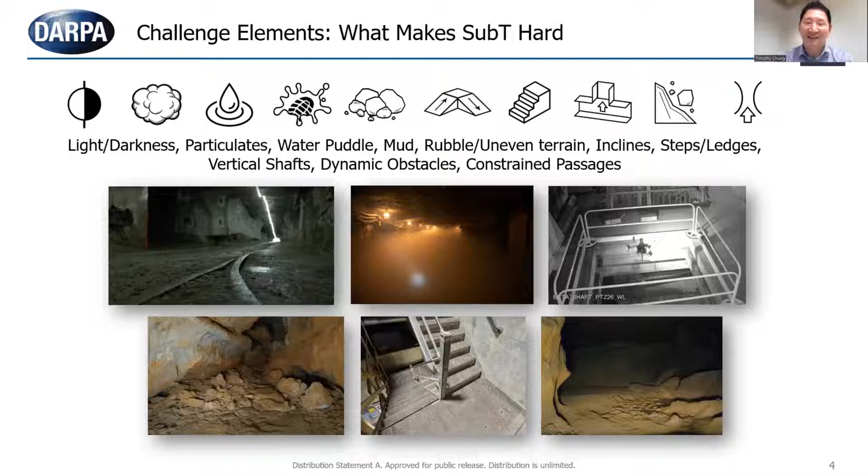All of this comes together in screenshots of environments that robots had to face throughout the DARPA Sub-T Challenge. This is what DARPA likes to do: take challenging contexts and turn them into areas where technology needs to be accelerated, designing a challenge to incentivize those innovations. Those innovations arose in autonomy, perception, networking, and mobility. While mobility may be the focus of this workshop, it really was the coming together across all four technology areas that was needed to succeed in the Sub-T Challenge.

So what was the Sub-T Challenge? It really was about conducting this underground scavenger hunt. DARPA placed a myriad of objects, which we call artifacts, in underground environments—tunnels, urban, and cave environments—and robots were deployed. No humans were allowed, and they never got to see what was in these courses a priori. These robots went into unknown underground settings and had to find and localize these objects to within a specific level of precision.

These weren't just visually identifiable objects—things like CO2, carbon dioxide gas, or thermal signatures that you had to localize, or maybe a Wi-Fi hotspot signature you had to go find. All of this needed to come together through multimodal perception. But of course, you have to be able to get there first to do those detections and localizations.

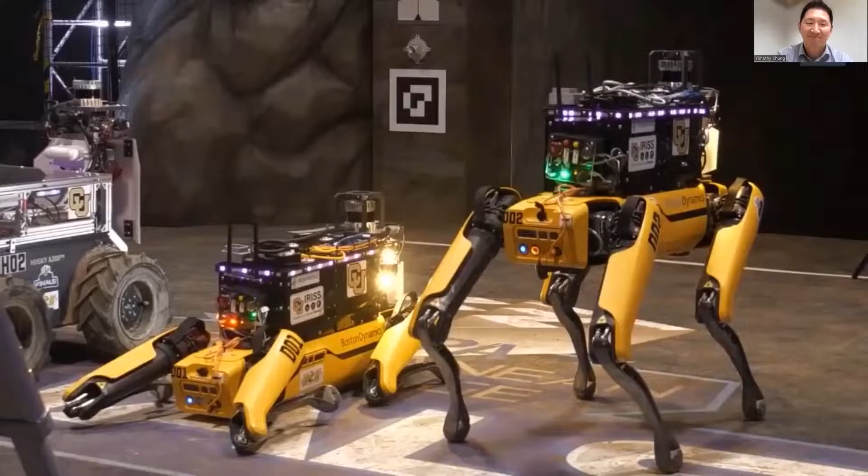Hello everyone, and welcome to DARPA's Subterranean Challenge, the final event. To me, these are the Super Bowl of the engineering and scientist community. It's been a lot of work, is really what it comes down to. It's been a long and hard journey for the last 3 years.

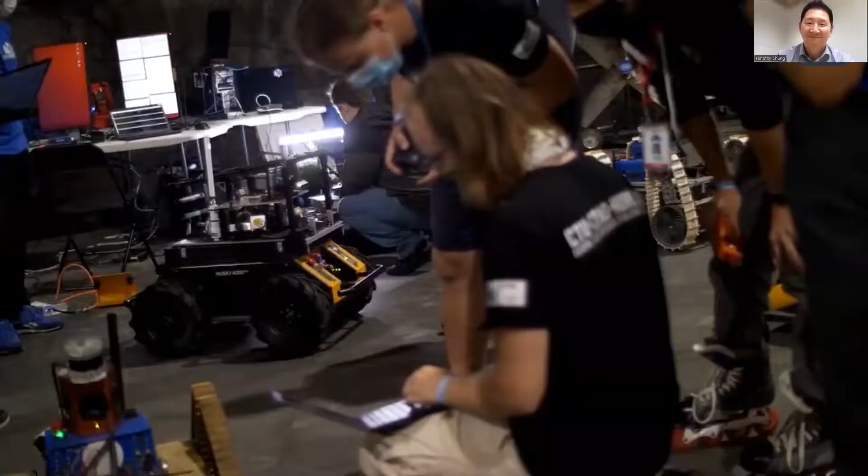Doing what we do and actually going out, seeing where the theory meets the pavement, it's world-class education. There is a lot of knowledge in this cave.

Hopefully that gave you a snapshot, and you'll hear more from some of our teams. I wanted to share the design of the course, where we took over a segment of an underground cavern and built a one-of-a-kind environment. What you're seeing here are the three different subdomains: cave, tunnel, and urban. We built this intentionally to stress test robots that need to maneuver through all three environments.

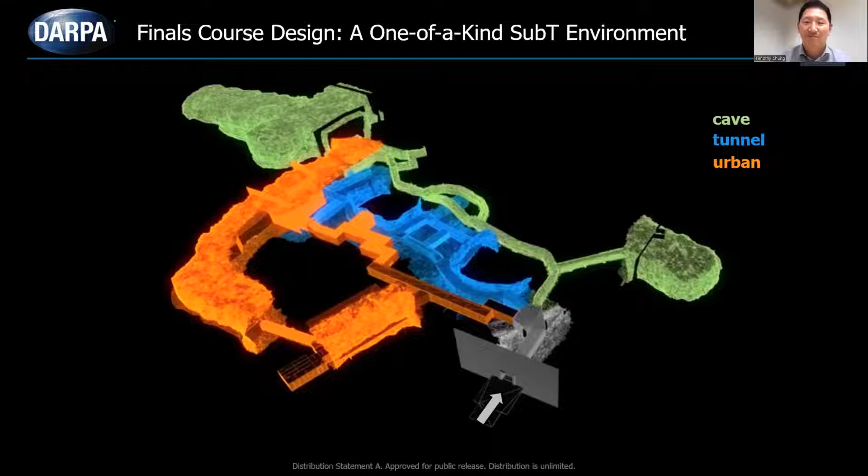In the interest of sharing some insights with this audience, I want to highlight three takeaways. There were many more, and we'll hear some of them shortly. One takeaway is that attrition of robots is not only possible, but very much likely in the real world.

One of the key takeaways for us was that most teams had robots that didn't survive even the first 10 minutes of an hour-long run, and not all robots that went in all came out of the courses on their own volition. There were a variety of reasons for that, the environment and terrain being one of them.

There were also commonly placed objects in the environment that one could never have really imagined would thwart our robots, whether they be air, ground, wheeled, legged, etc. I think that's one of the takeaways.

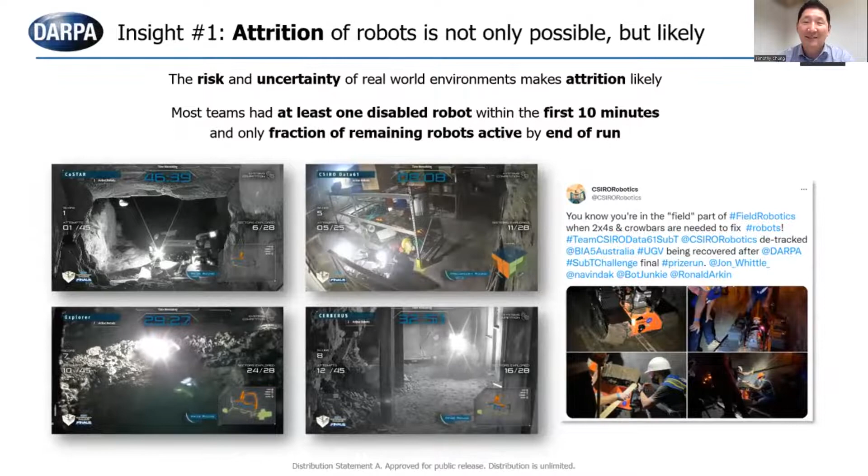Understanding what it means to be resilient, whether that means recovery mechanisms or redundancy in terms of number of robots, I think are all part of the issue. So reliability, streamlining the integration process, having things that are adaptive and offering recovery behaviors built into your robotic systems, like being able to right yourself if you've fallen down.

In the interest of time, I won't go through all of these attrition mitigation strategies that many teams employed, but listing here, there are a number of different ways one team had to think about how to recover from failure or mission impairment of any of their robots.

The second insight that many of us faced was that being able to create a map, which is our bread and butter in the robotics community, does not necessarily imply that you've done a good job of gathering and accruing situational awareness. Even if you were to generate a full map of the environment, that doesn't necessarily mean you've accomplished the mission. Mobility is just part of the solution here.

You need to get everywhere, of course, to get that map, but there needs to be a lot more than just getting there to accomplish the mission. What I'm showing you here are the types of maps the teams were able to generate, and you can see a high degree of fidelity in these maps.

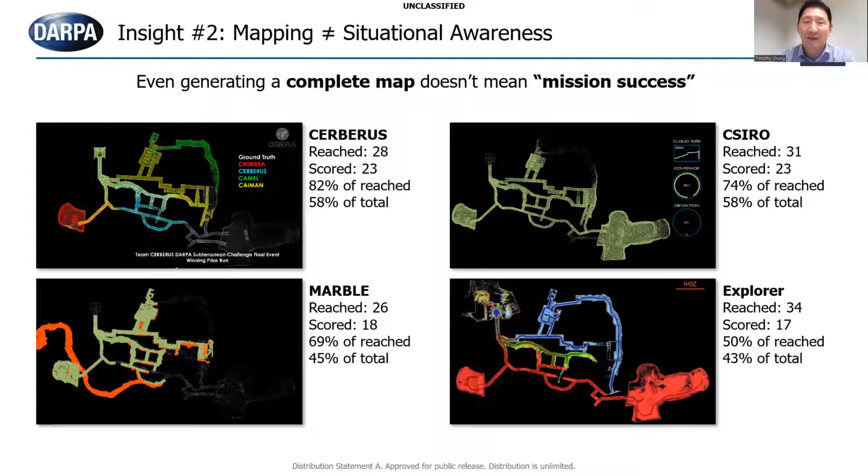But in the context of the artifact scavenger hunt, just because you passed by it doesn't necessarily mean you were able to score it. So I think that's another takeaway. As we think about mobility as an enabler, it is not the end-all and be-all, I think, is the takeaway.

One way to help maneuver in that space would be to enhance the ability to have context in our perception, to understand the human teammate construct, since requiring human inputs is, in many cases, a limiter. You also need multimodal sensing to truly handle and detect all the diverse types of artifacts, so enabling better cross-cueing across detections could potentially help. SLAM is foundational, as we all know, but there's a lot more to it in order to claim mission success.

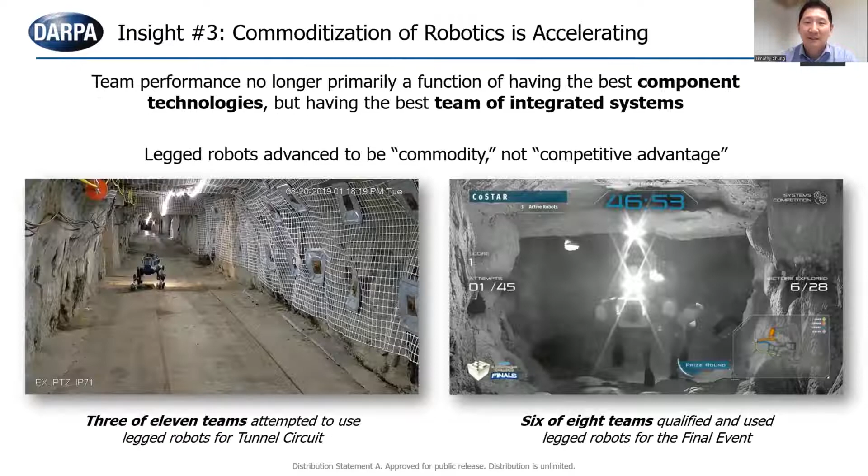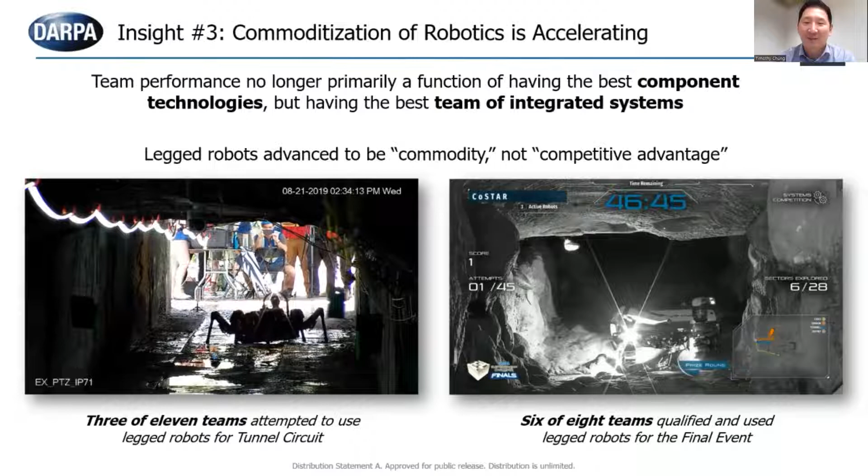Thirdly and finally, the commoditization of robotics. I note that this is the 6th workshop for legged robots. If you were to look at where we started back in 2019 in the coal mines of Pittsburgh, we did have teams bring their legged robots out to that tunnel circuit competition.

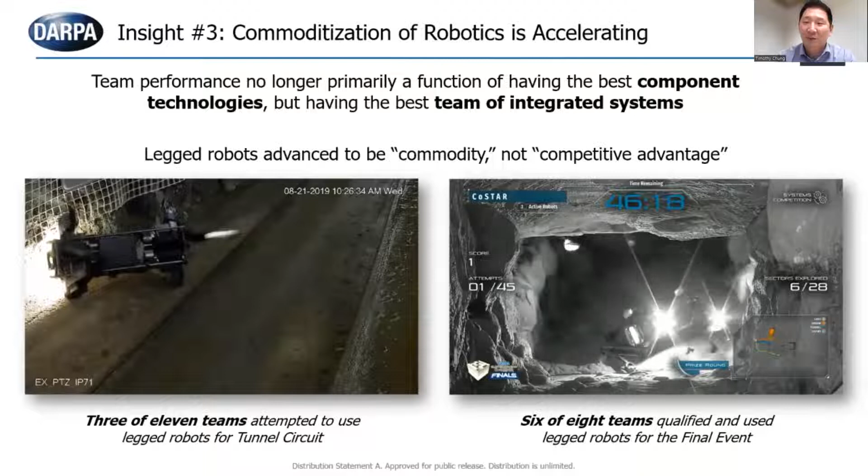While it was a small fraction of teams able to do that, we also saw severe limitations operating in environments with mud, holes, rails, and other things that would literally trip up the legged robots. But what you see in the final event on the right-hand side is the significant growth and maturation of legged robotic technologies, to the point where it was no longer a liability. It was no longer even a competitive advantage in the sense that only one or two teams were able to make use of legged robots.

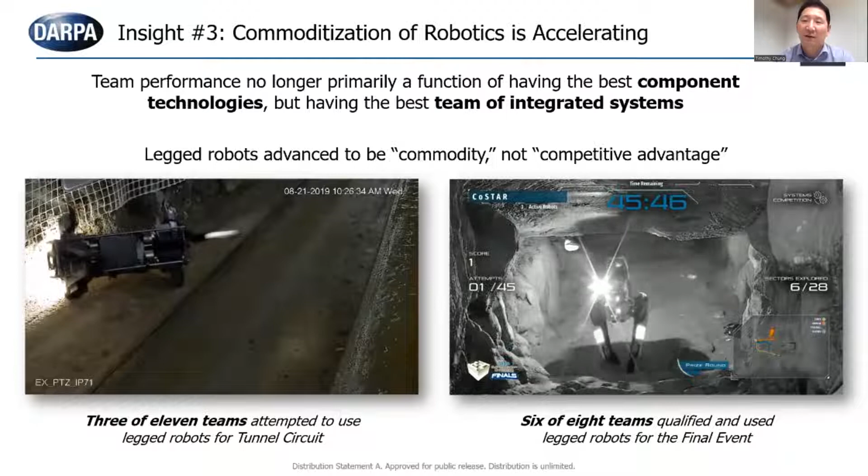In fact, it became more of a commodity, where 75% of our teams are fielding handfuls of legged robots and able to use them to good effect, and to turn around technologies with integration in just a couple of months.

The takeaway message here is that legged robots, thanks in part to this audience, have really become an enabler for all of the other things we're interested in. We saw that transformation happen over the lifespan of the DARPA Sub-T Challenge with these commercially available, off-the-shelf platforms, enabling integration in even under a couple of months, and finding ways to take cutting-edge research and apply it in these field settings. I think that's a phenomenal testament to the commitment of this community specifically focused on legged robots.

I'll close by highlighting that even with the conclusion of the DARPA Subterranean Challenge, we still have many more lessons to go. The real world poses many additional obstacles we have yet to face, mobility being one of them. It's still not a conquered, solved problem, thankfully for all of us here. But I'd encourage us to think about going beyond mobility and understanding what it means to address the missions and environments holistically.

Legged robots are complex systems, and there's a lot of additional work we want to do there, but what can we do when we think about how we compose our fleets of robots? How do we deal with attrition and isolation of these robots, especially in multi-robot teams? What information, if you had it going into these environments, could dramatically improve performance with a little a priori gain tuning or what have you? And then there's this idea of when do you give up and when do you try harder. I think that's really interesting for having a little self-introspection for our robots, and mobility is definitely a part of that conversation.